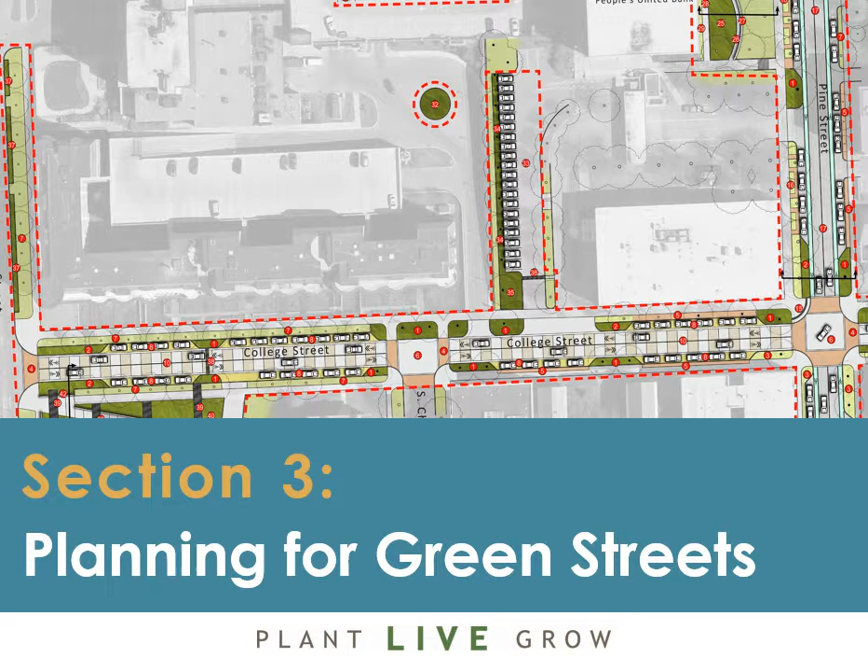Section 3 discusses planning for green streets. Green streets offer opportunities for communities to address water quality goals while creating public spaces that deliver social and economic value, as well as protecting the environment and improving water quality. To successfully launch a Green Streets initiative, communities must follow a thoughtful planning process that engages the community in examining their local conditions, identifying and setting goals, and developing future opportunities and projects for green streets in their community.

From the beginning, communities should craft a clear vision around why green streets are important. The visioning process should address the three components of green streets. First, it must provide transportation options to walk and bike and take the bus. Second, it should create vibrant streets through placemaking. And finally, they should contribute to a sustainable environment by improving water quality in our downtowns and villages.

Communities will vary in their vision and goal setting depending on local capacity and leadership, community priorities, and available resources and funding. One way to inspire the community is to share local case studies from other towns that show the multiple benefits of green streets.

From the beginning, you need to involve the community, including local, regional, and state partners, as well as local business leaders. A local Green Streets initiative should be a community-driven process that engages the public and requires the involvement of key stakeholders to identify goals and future opportunities for Green Street projects. Including a diverse array of stakeholders from the beginning will help generate critical buy-in and create the necessary support for the Green Street project. Potential stakeholders to consider including are, of course, the community at large.

Local residents often bear the cost of infrastructure improvements and long-term maintenance and can help support the project over the long term. The Town Public Works Department and the Vermont Agency of Transportation district staff will also know whether they have the capacity, the skills, and budget to maintain changes within the travel lanes, sidewalks, and public parking areas. And anything that is being proposed in the public right-of-way must include the Public Works Department or Town Highway Departments. And if the project involves work in a state highway, then the VTrans district staff should be contacted and be involved in early coordination of the project.

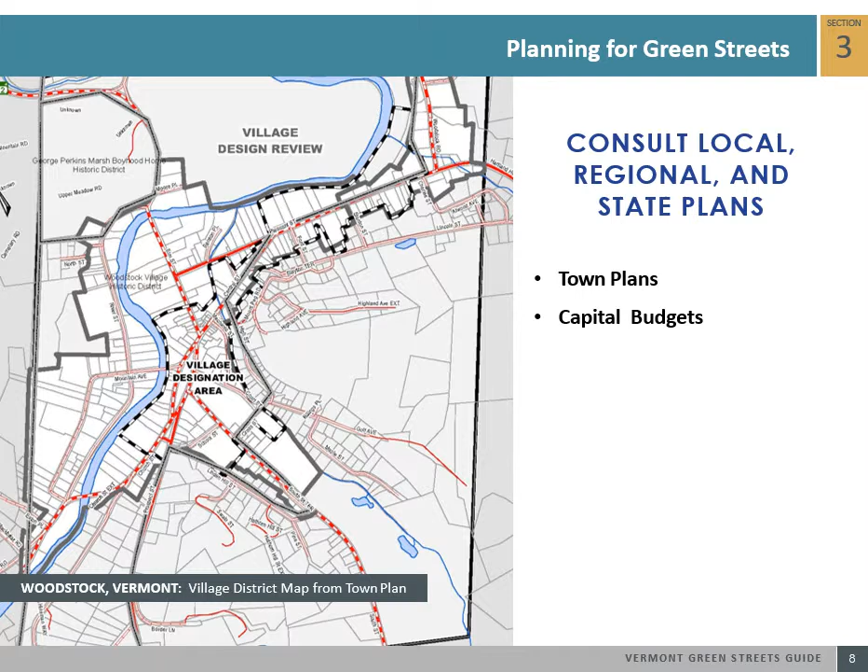Reviewing and consulting the municipal plan and local capital budget can give you a sense of the goals, priorities, and future investments in the community. A careful analysis of local policies, plans, and capital budgets can provide meaningful insight into a community's priorities and future investments. Towns often identify future streetscape and green space improvements as a goal in the town plan, and during future municipal plan updates, towns could also identify future opportunities to include goals that support the vision of green streets. Communities also use regulations to implement green infrastructure investments through zoning, subdivision regulations, and low-impact development management standards. Vermont's Green Infrastructure Toolkit offers model language.

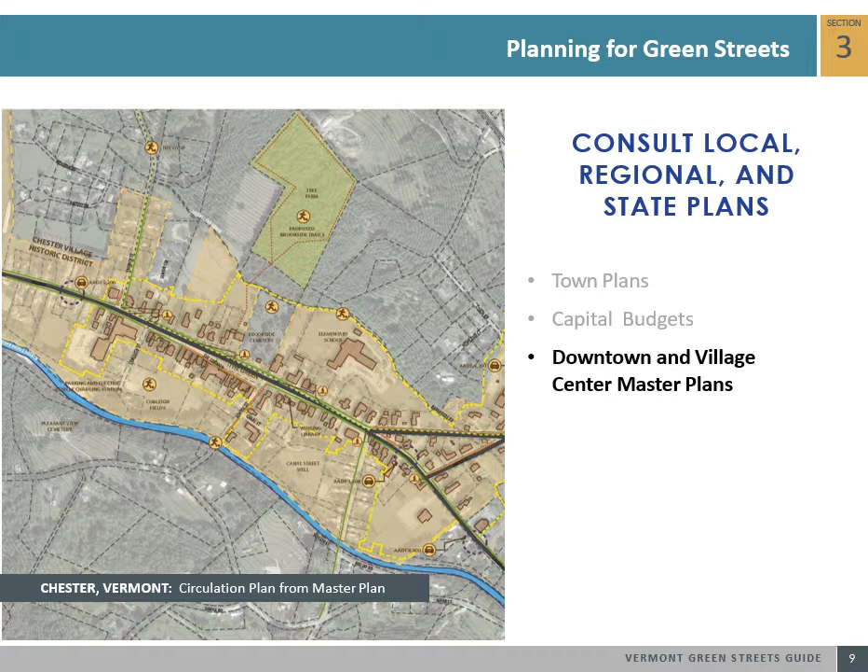Some communities may have a downtown, village, or neighborhood master plan, which can offer a more detailed, community-driven vision of the built environment, including its streets. Frequently, these plans are very illustrative in their nature and offer detailed green street strategies for improving the public and private realm. Master plans are action-oriented and lay out a strategic implementation plan for both short-term and long-term public and private investments, including green infrastructure in the downtown.

Vermont's 11 regional planning commissions develop regional plans that include an analysis of the regional transportation system, future regional land uses, infrastructure, and community facilities. Regional plans may have specific information regarding transportation improvement projects or areas in need of specific stormwater-related improvements. Additionally, many regional plans include policies supportive of complete streets concepts that are relevant to green streets implementation. Examine these plans for indicators of areas with significant water quality and quantity problems or for any basin-wide planning initiatives.

Regional Planning Commission staff are a valuable resource that are able to provide data, mapping, and guidance with regard to regional transportation infrastructure, flood resiliency, and water quality protection. Towns engage in various planning efforts focused on assessing and protecting water resources. The Vermont Department of Environmental Conservation, DEC, develops the River Corridor Plans and the Tactical Basin Plans.

River Corridor Plans focus on the current conditions in the streams and rivers and provide goals for preservation, protection, and restoration, while the Tactical Basin Plans guide all work in the watershed, helping identify priority projects including river corridor plans, stormwater master plans, backroad inventories, green infrastructure improvements, and agricultural environmental assessments.

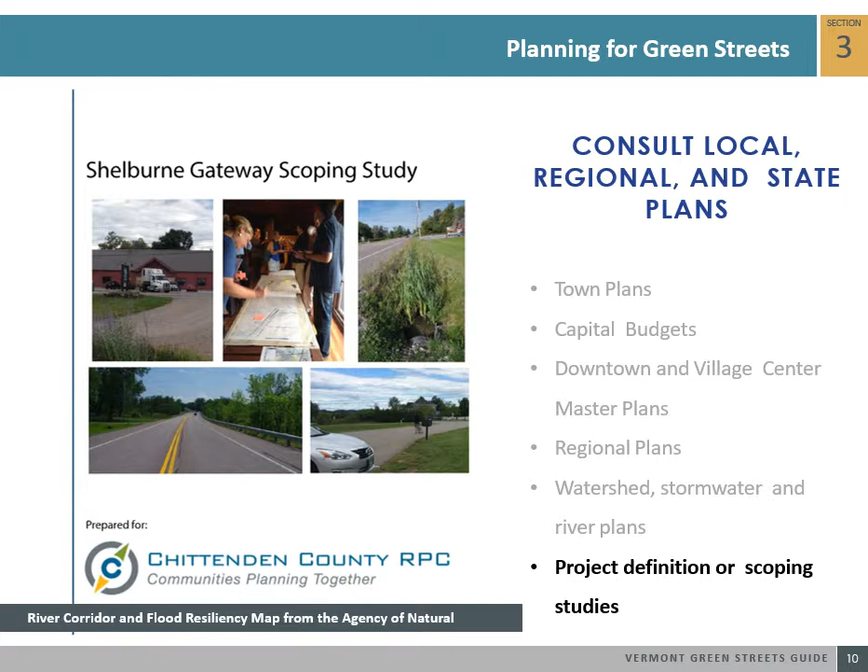Communities may have transportation studies or bicycle and pedestrian scoping studies that offer improvements to improve the walk and bicycle options in their community. If a municipality intends on using state and federal transportation funds to implement a project, it is highly recommended they undertake a scoping study to explore alternatives and develop implementation recommendations. Scoping studies can be funded through the VTrans Bicycle and Pedestrian Program.

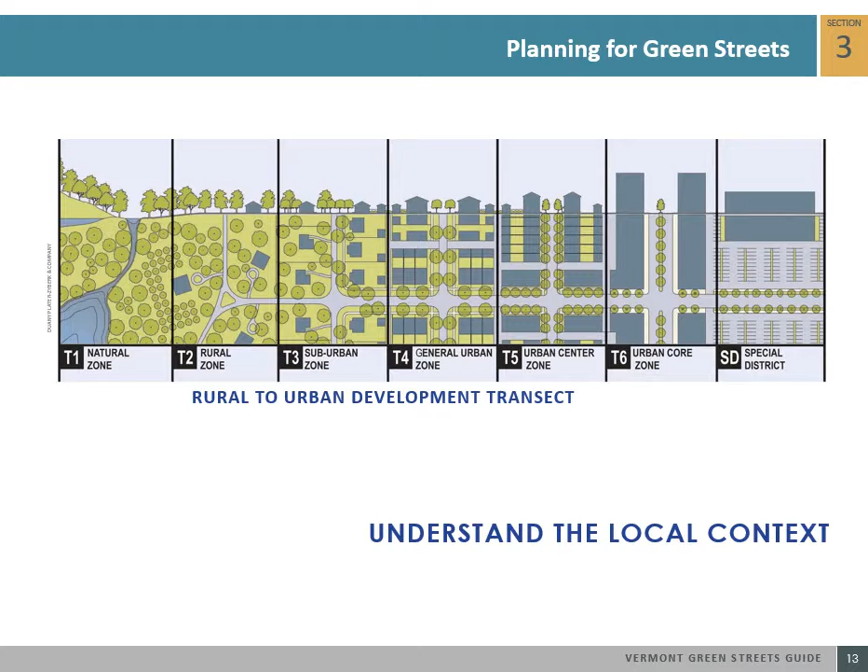One of the key principles of green streets is to understand the local context and surroundings. Recognizing that there is no one-size-fits-all approach for green street projects, the rural to urban transect can help guide what type of green street investment is appropriate for what area of town. Identifying what projects are appropriate in each context is important to consider and can help inform the project type and implementation. The function of a street should be considered when evaluating its green street opportunities.

What type of street is it? While adding vegetated swales or curb extensions to a neighborhood street may be appropriate for traffic calming, reducing travel lanes and providing landscape medians might be better suited on an arterial road. What is the street's jurisdiction? Major routes through downtowns or village centers are often shifted to local control, called Class 1 highways, which offers the municipality more design and maintenance flexibility. If the state owns and maintains the highway, early and frequent coordination with VTrans and the local district staff is imperative.

What is the role of the street in the transportation system? Is there heavy through traffic or is it a low volume side street? Is it a main street or a major truck route? What are the existing bicycle and pedestrian patterns and infrastructure? The level of traffic congestion is also necessary to understand, as there may be opportunities to reduce or change the number of lanes to better suit current travel patterns, freeing up paved areas in the process for green street improvements.

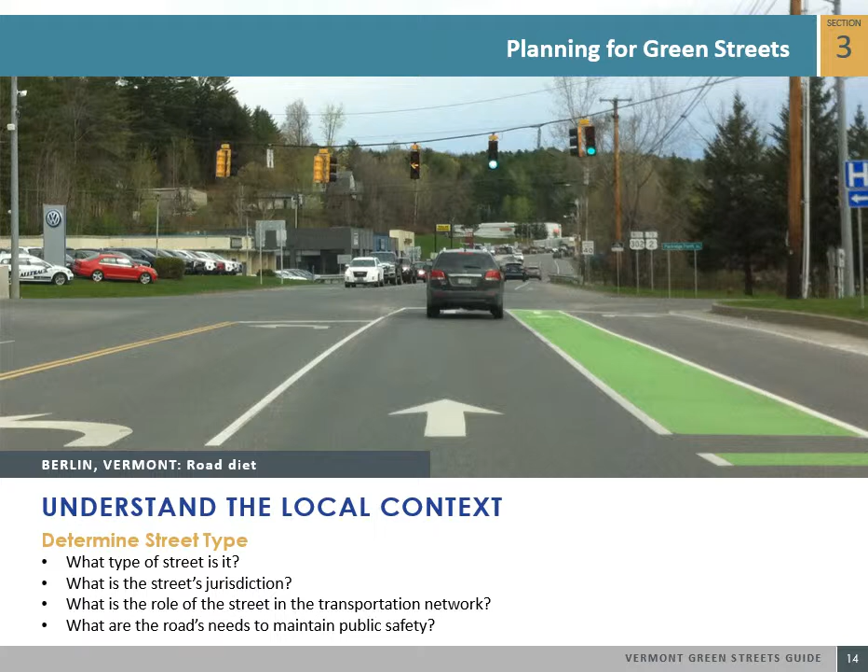What are the road's needs to maintain public safety? Depending on the type of street, maintenance needs will vary. If the street is a main arterial for emergency services, it's expected to be plowed quickly during winter storm events, and this may require larger equipment that could conflict with green street elements. Towns need to understand their local capacity to maintain green streets over the long term. A green street project is like any other infrastructure project and will need maintenance, monitoring, and eventual replacement.

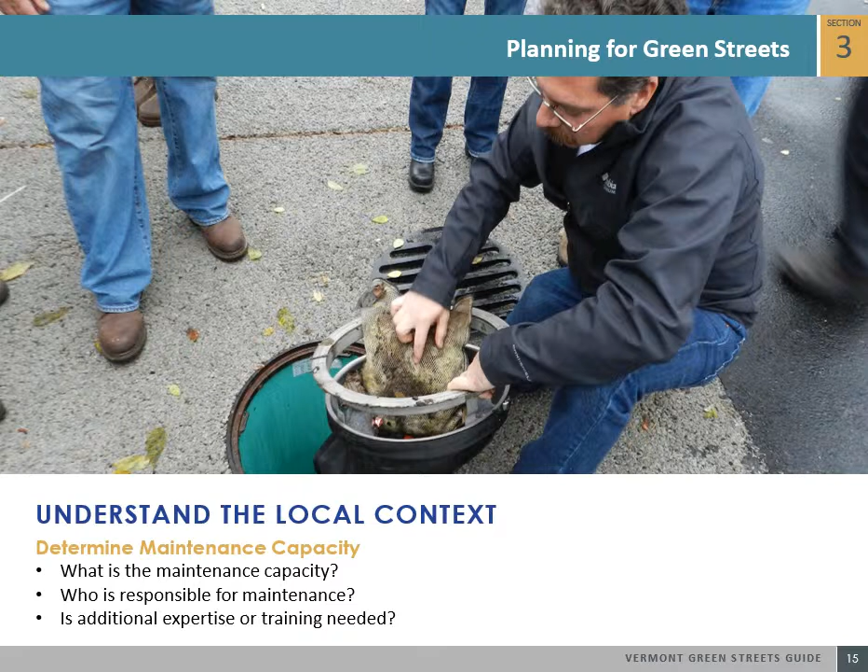What is the local capacity of the town's departments to maintain these investments? Who is responsible for the maintenance? Is additional expertise or even equipment needed to maintain the green street investment? Local knowledge and maintenance expertise involved early in the planning process are essential to the success of a green street project. There are plenty of opportunities for introducing green streets along Vermont's roadways.

The key is to have the vision to identify these opportunities in both retrofit conditions and new development opportunities. One of the greatest ways in implementing green street projects is to look at the current streetscape environment, identifying opportunities that could benefit from green stormwater management best practices. Many streets are wider than necessary, given their current and even forecasted travel demand. Consider narrowing travel lanes down to the Vermont state standards width of 10 or 11 feet for downtown and village streets.

Reducing street width reduces impervious surface areas and infrastructure costs, and slows down traffic, creating safer streets and promoting walkability. The extra space provides room for decentralized green infrastructure to absorb stormwater during rain events and provide landscaping in our downtowns and villages. For smaller residential streets, consider retrofitting underutilized landscape buffer zones for rain gardens or other bioretention areas for stormwater management. Are there existing zones marked no parking that can be turned into landscape areas designed to capture stormwater in your community? Or can the size and number of on-street parking spaces be reduced in favor of increased landscape area along a street? Angle parking takes up more space than parallel parking.

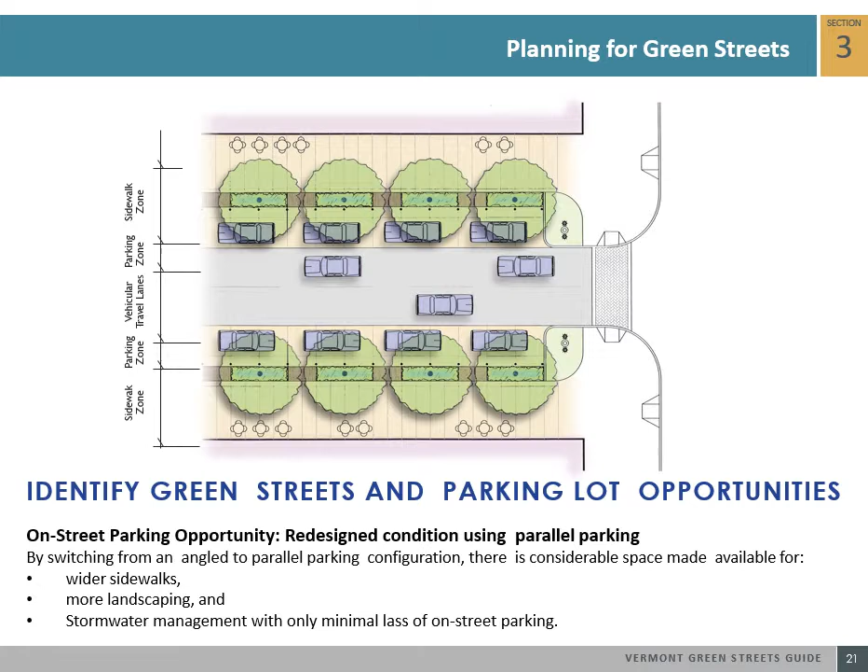Towns can explore ways to redesign on-street angled parking to on-street parallel parking to increase safety and create more space for wider sidewalks for outdoor cafes, providing landscaping and street trees, and manage stormwater better. Providing additional landscaping, street trees, and wider sidewalks adds vitality to the downtown and village, and it can enhance the visitor experience and improve the overall quality of life and livability of the downtown or village center.

There are an estimated 800 million parking spaces in the United States. Take a moment to imagine. That's almost 2.5 parking spaces for every person in the U.S. Many of these spots exist in large, paved parking lots with lots of impervious cover. A sea of asphalt. Green infrastructure can be incorporated into parking lots to moderate summer temperatures, improve safety, enhance aesthetics, and provide valuable stormwater management. Parking lots can be retrofitted with some simple adjustments.

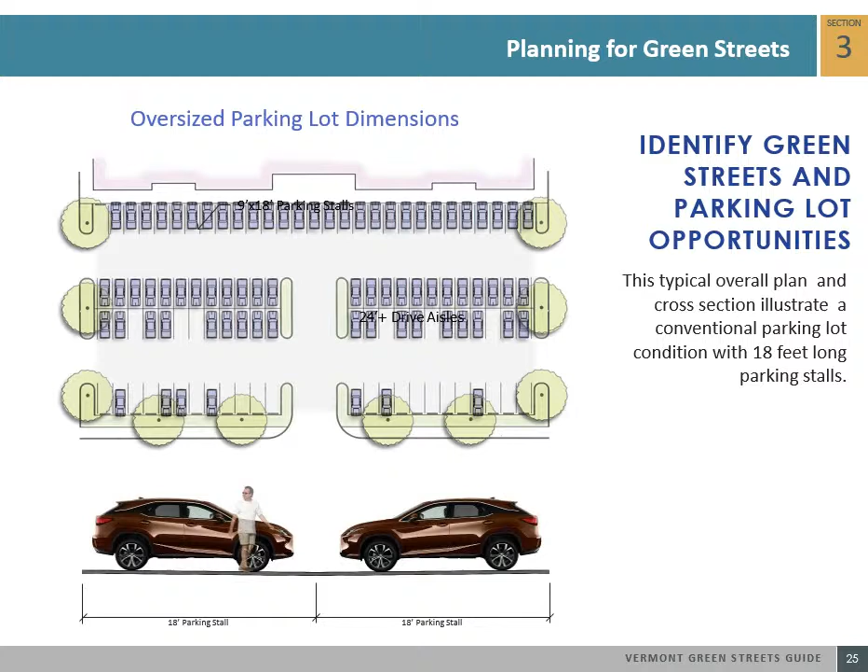For new development, consider removing or adjusting parking minimums in your zoning bylaws. This will reduce the size and number of parking spaces in large parking lots, freeing up more space for green infrastructure. An example of how changing your town bylaws can support green infrastructure. This typical site plan and cross-section illustrate a conventional parking lot condition with 18-foot long parking spaces. Changing your town bylaws to a 15-foot parking stall length and a 22-foot driving aisle can provide more areas for green stormwater infrastructure and new development.

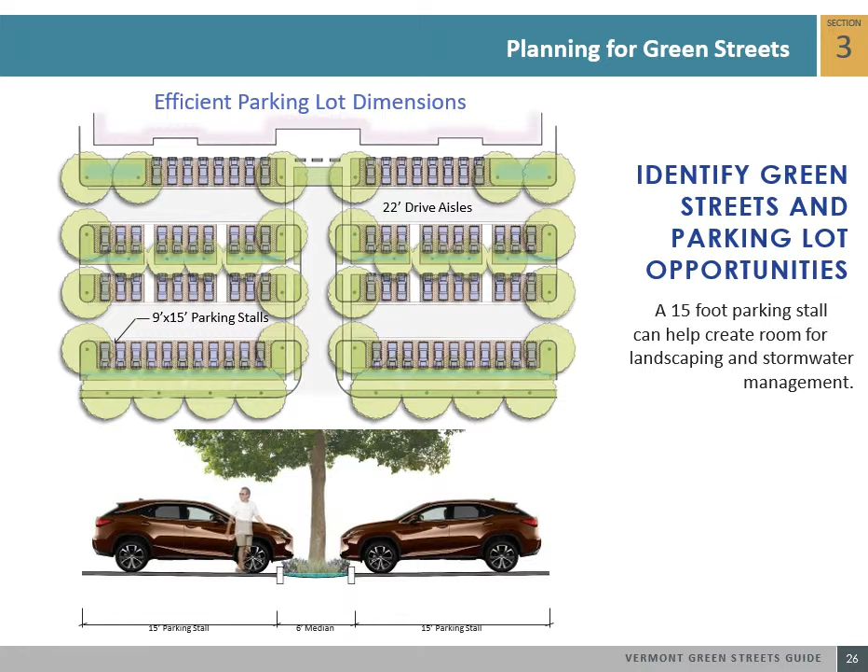Green streets can be incrementally applied in our communities. There are multiple shades of green. The degree to which a project takes the green streets approach can vary based on goals, available resources, the local capacity, and space constraints. We can think of green streets as having various levels ranging from the simplest Level 1 designs to the most complex Level 5. The most sophisticated green streets designs intertwine stormwater management with livability, complete streets, and placemaking.

New and redevelopment projects offer opportunities to achieve a higher level of green street best practices. Other projects, especially retrofits, might only be able to achieve minimal green design due to site constraints or existing policy or infrastructure constraints. In Level 1, it's simply an increase in the amount of landscaping along a street, and it reduces the area of impervious surfaces to capture stormwater.

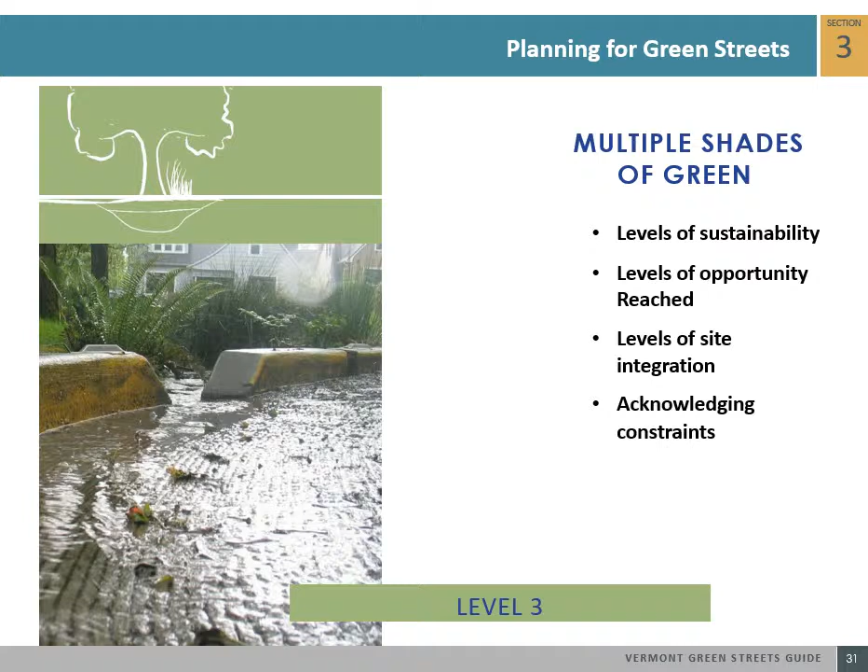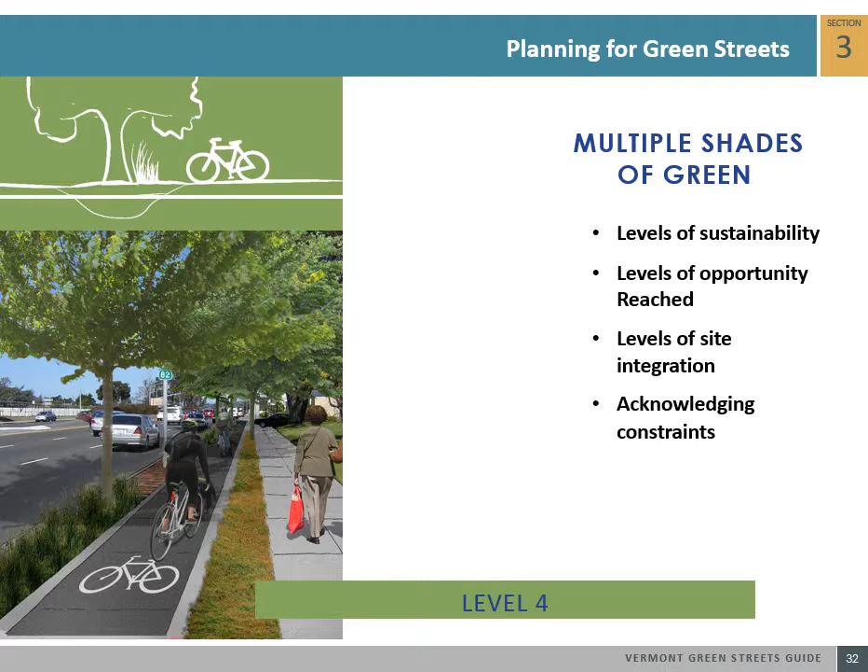In Level 4, it includes the best stormwater management practices of Level 1, 2, and 3, while also providing a direct emphasis on alternative modes of transportation, such as walking, biking, or transit. And finally, Level 5 is the most efficient and effective level of green street design. It is the most challenging to achieve, however. This comprehensive approach allows stormwater to be managed entirely within the streetscape. Stormwater from private driveways and buildings can be managed within the public right-of-way, and stormwater from the street is filtered in available landscape spaces on private property. A true mixing of the public and private realm.

Finally, just keep it simple. Just as green streets can have multiple shades of green, they can also have multiple levels of complexity. Identifying projects that are simple and low cost to implement are great ways to get started. Too often, very complex green infrastructure projects are planned, and it takes a long time to secure the necessary funding to implement.

Simple, low-cost green street projects might include modifying underutilized spaces that already receive stormwater, or conversion of on-street parking spaces with an existing drain inlet into a stormwater curb extension, or the addition of street trees along Main Street, or even adding a lawn strip along a residential neighborhood street. These solutions rely on simple regrading or replanting, minimal hardscape improvements, and little or no alteration of the existing stormwater system.

Developing your plan of action: identifying your vision, your goals, and objectives, and understanding how these relate to the local context is essential. However, equally important is identifying the barriers to implementation, which can include physical and environmental constraints, lack of community support, land ownership, funding, and maintenance.